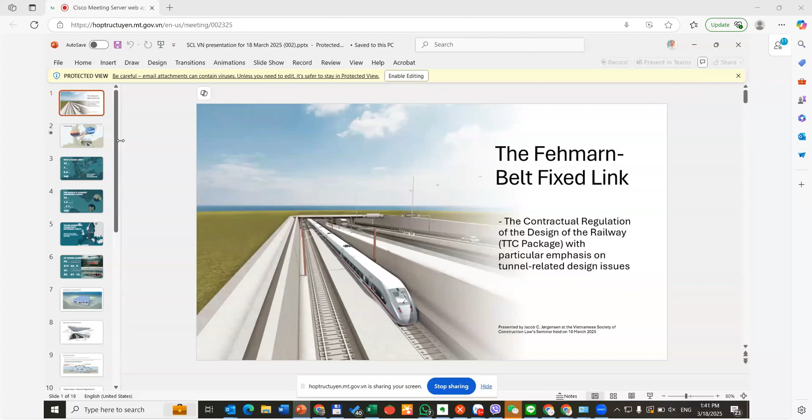So the fixed link you'll see at the bottom there is linking the island of Lolland, which is the southern island of Denmark, with the northernmost island of Germany called Fehmarn. It's part of at least one other fixed link, the Øresund link, which links Copenhagen to Malmö in Sweden. We also have a third asset in the company I work for called the Great Belt Bridge, which links Zealand to Fyn in Denmark.

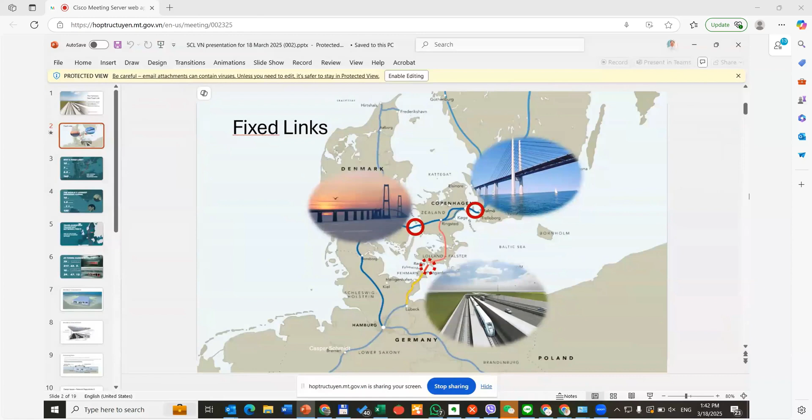So the Fehmarn Fixed Link is essentially aimed at facilitating the transportation of goods by rail from mainland Europe through Scandinavia up to Sweden, Norway, and Finland. You can see the numbers there.

As you'll see in a moment on the other slides, the link will have both a train or rail connection and road tubes. The road will take about 10 minutes by car to cross, going at 110 kilometers an hour. By train, going at 200 kilometers an hour, it's a 7-minute journey, and that will cut the transport time from Copenhagen to Hamburg down to 2.5 hours, saving approximately 160 kilometers.

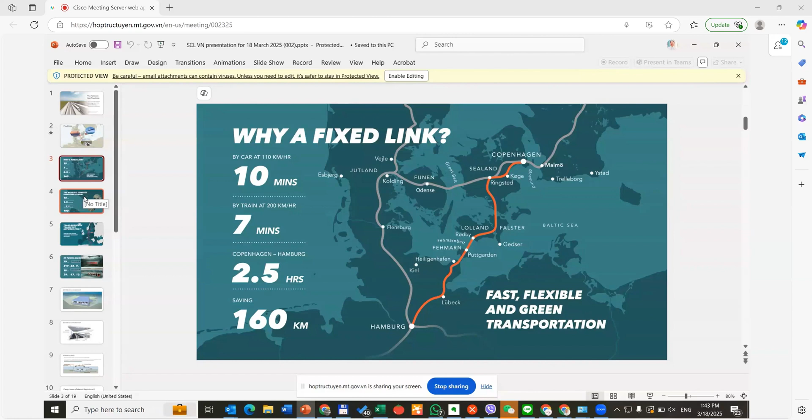So it's currently the longest immersed tunnel of its kind in the world. It has, as I said, 18 kilometers in length. The tunnel elements, which you'll see in just a moment, are manufactured at a factory in Denmark. That's the top circle you'll see there, the harbor and the basins where we push the tunnel elements into. The construction budget is 7.1 billion euros, and it will be 100% user financed.

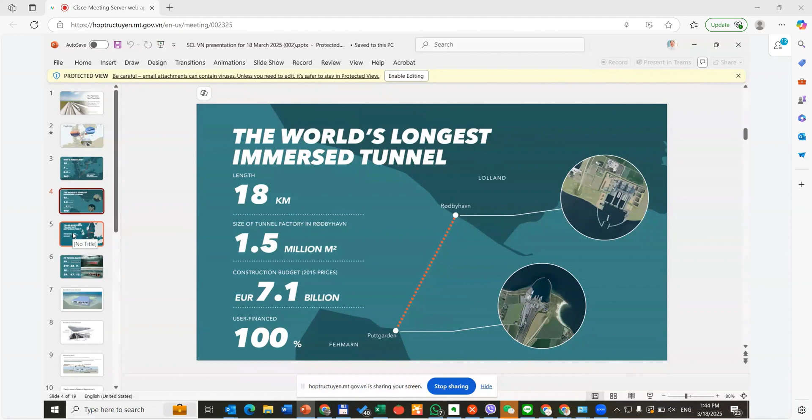It will become part of the so-called TEN-T, the Trans-European Transport Network, which, as you can see, will link Sicily down south to Norway and Sweden up north. So it is currently the missing link in that massive rail connection from the extreme south of Europe to the extreme north of Europe.

So the tunnel consists of 89 tunnel elements in total. There are 79 so-called standard elements.

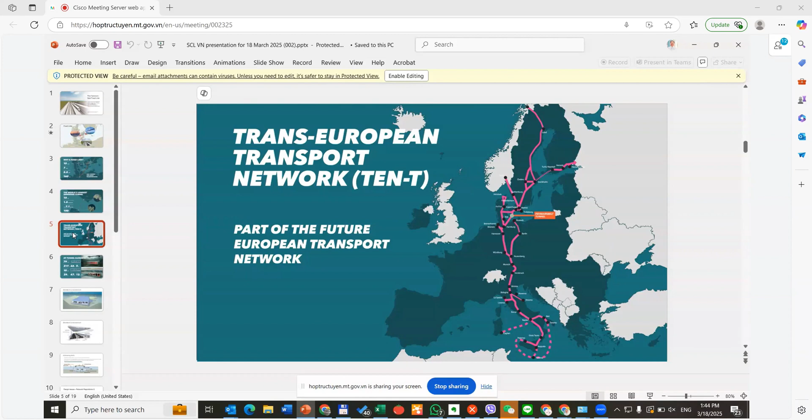So the standard tunnel elements are 217 meters in length. They are 42 meters wide and 9 meters tall. In addition, there are 10 so-called special elements with basement compartments, and you can see that they are shorter: 39 meters long, still 47 wide, and 13 high. The height is because of that basement compartment.

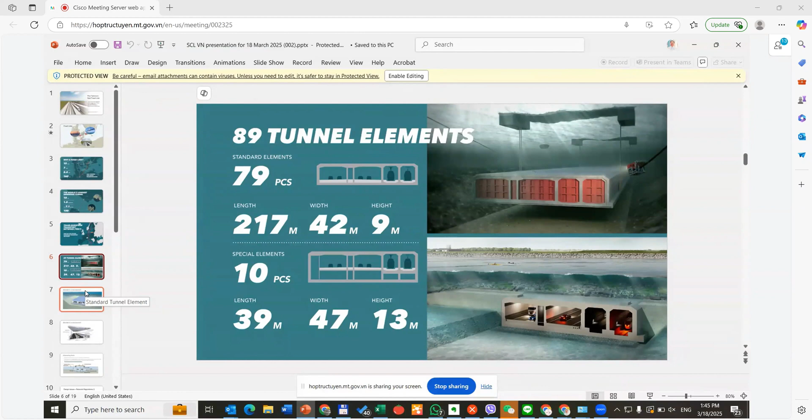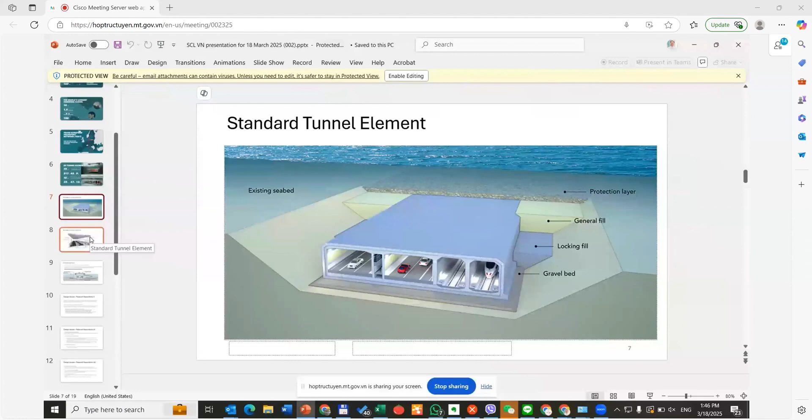There you have an illustration of a standard element. You can see that it is immersed into a trench that's been dredged into the seabed. You can also see the 2 road tubes to the left, and the train rail is in 2 tubes to the right. There's a gallery between the 2 road tubes for servicing the tunnel. When immersed into the trench, there will be a need to lock in the element. That's done with the locking fill, illustrated there to the right, which will prevent the tunnel elements from moving in the trench as a result of current and underwater waves. Then there's general fill on top of that, and finally a protection layer which will cover the tunnel elements totally under the seabed.

That's another illustration of the standard tunnel element, perhaps showing a little more clearly the road tubes, and to the right the train rail.

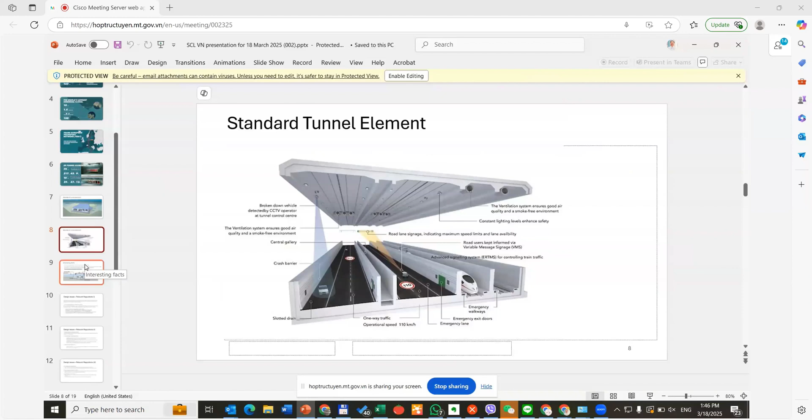So some interesting facts for you. The amount of rebar we're going to use for this tunnel corresponds to 50 Eiffel Towers. We have dredged, or rather our contractor FLC has dredged, 15 million cubic meters of seabed, which has been used to expand the Danish southern coastline with a total landmass of 2.3 million square meters, slightly bigger than the state of Monaco. If you try and click the link, Chung, there's an interesting video which I think we might have time for.

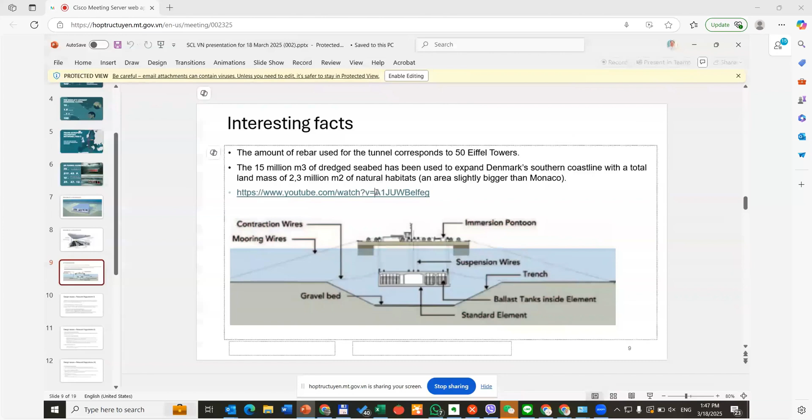Don't know if that works. If it doesn't work, maybe it does work. There we go. Oh, some Vietnamese commercials first. You can skip that. There we go.

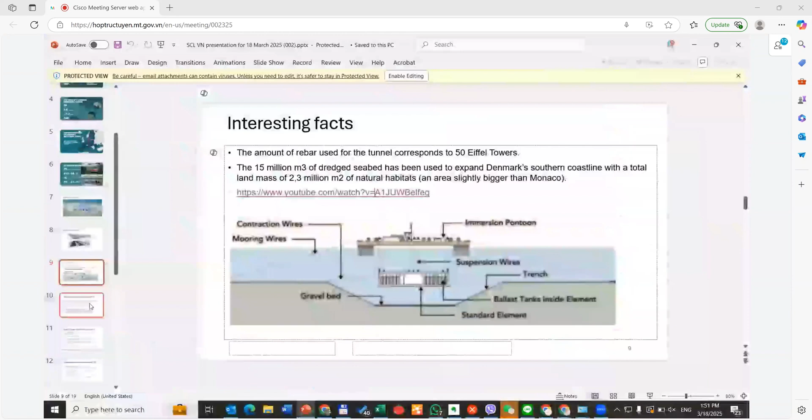So the train connection, which is probably of interest to some of you, this is not a high-speed train as defined under European standards. However, the train connection between Denmark and Germany that this tunnel will cater for has many similarities to a high-speed rail project. I will try over the next slides to give you an idea of how the design of the train, or the rail in the tunnel, is done.

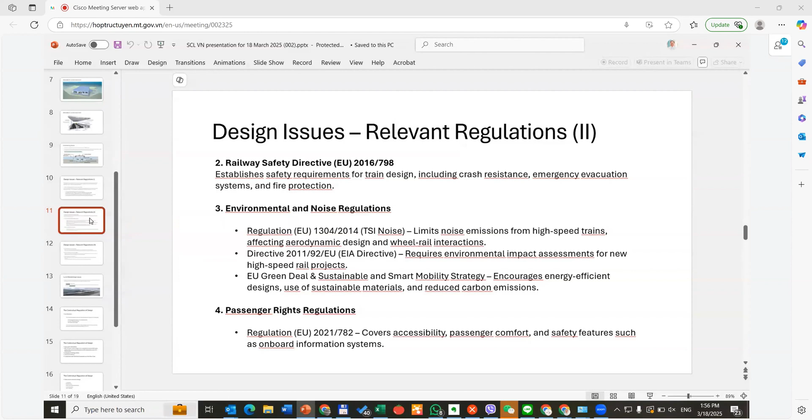These are interesting, I think: fire safety and crashworthiness. There are two standards typically in play. The first on crashworthiness sets crash energy absorption requirements, and the next is on fire safety. Then there's one on electromagnetic compatibility, in a directive from 2014, which ensures that high-speed trains do not interfere with other electrical systems such as signaling and communications. Then we have a standardization and certification regulation. In Europe, the European Union Agency for Railways, or the ERA, has to certify the trains, including high-speed trains, before they are put into operation. And according to contracts, compliance with EN and ISO standards is always required in practical life.

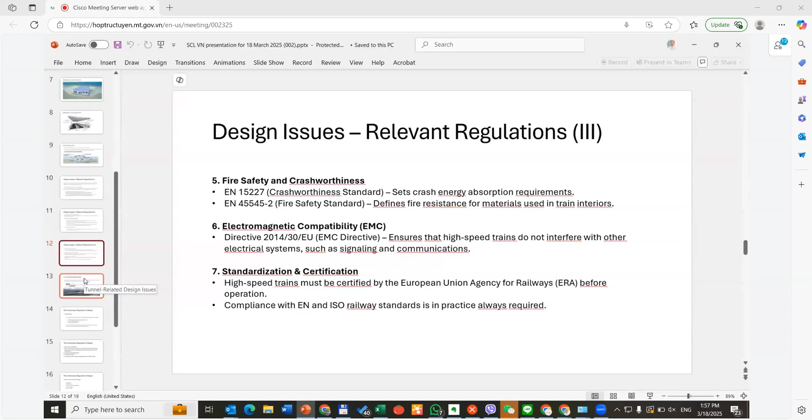So looking at the tunnel-related design issues specifically, there are two I picked out here. One is on the size of the tunnel, which has to correspond to the train speed. If you go into a tunnel with too high a speed, I've been told by the technical guys in my organization, the sonic boom will expose the train, the rolling stock, to loads they're not designed for. So there has to be a correlation between the size of the tunnel and the speed of the train.

The other issue is related: it's on pressure loading when going into the tunnel, because of the air pressure that the rolling stock is exposed to. You'll have to make sure that your procurement of the rolling stock is done and designed in a way that it can withstand this.

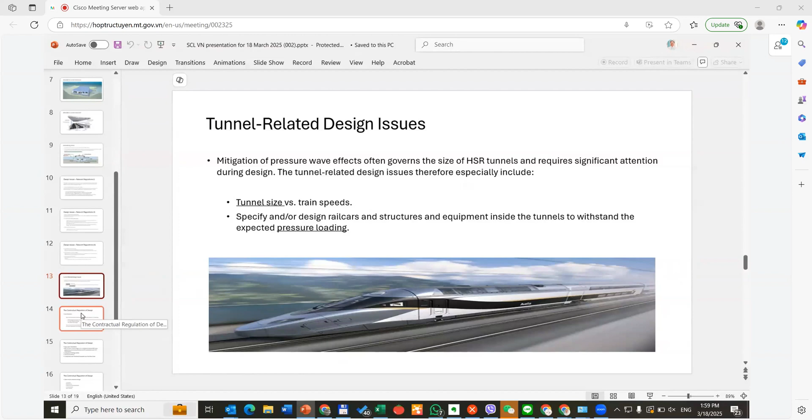Looking at the contractual regulation, what I got from the previous presenter is that the FIDIC form of contracts and the ones we have in our project are very, very similar, almost identical. So key elements here: in our project, the rail-related parts are split into the packages I mentioned.

First, the civil works, that's the casting and immersion of the tunnel elements, with 2 tubes for trains in each direction. Then we have the TTC, the train track and catenary package, that's the track and the power that will energize and allow the train to move. Finally, we have the TPS, the tunnel power supply, a transformer station that will supply power to the entire tunnel, including the train.

This is an EPC package, and the contractor is responsible for the design and compliance with technical standards for interoperability, etc. So basically, all what I just mentioned will be for the contractor to comply with when designing the train packages.

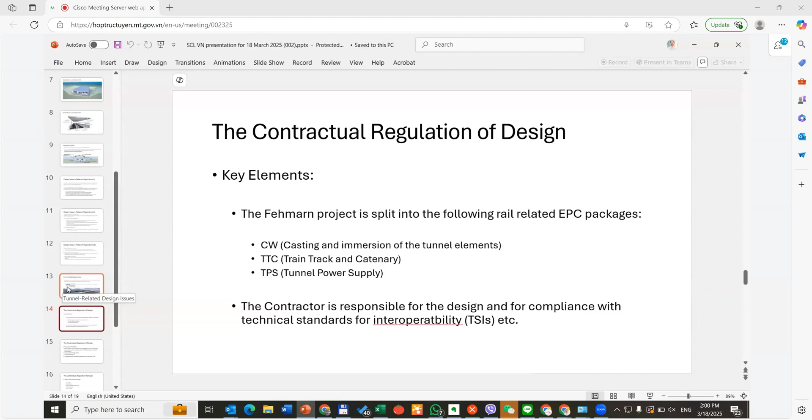Like you have in the logic form, the usual clauses there: rely upon information. The employer will provide information that the contractor can rely upon when designing the package.

We have modeling in our contract. All parts of the design must be modeled as per the BIM specification. This will facilitate managing interfaces to other parts of the project. So everything is done in BIM.

We have rigorous testing criteria. The adequacy of those is the employer's liability or responsibility.

We have the usual clause on ground conditions. The contractor must check the information given and design accordingly. And if the contractor sees something that is going to give rise to issues, he must notify the employer.

Same as you have in just about any other large EPC contract, whether it's based on logic or FIDIC, it's the same: compliance with technical standards as at the base date. If those standards change over the course of the project, this can give rise to variations or variation claims from the contractor.

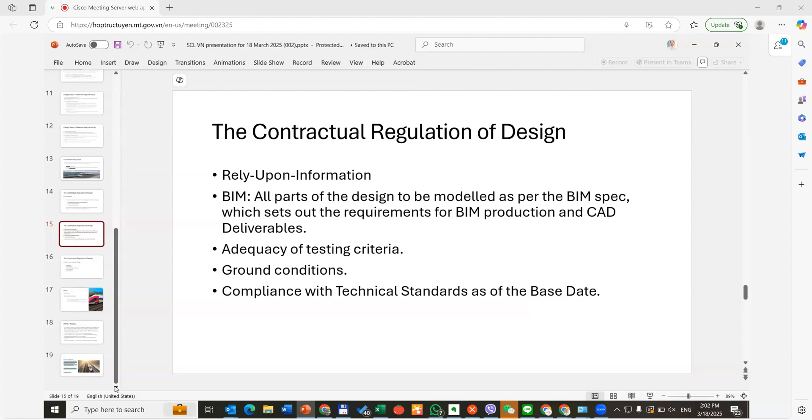Other issues here: availability. The amount of outages you can have per rolling stock is defined in the contract.

Maintenance guarantees go hand in hand with the availability. Safety and risk assessment is regulated. Interoperability is a key issue because the train in our project goes from Denmark to Germany. And finally, O&M training - all that is regulated in detail in our contracts.

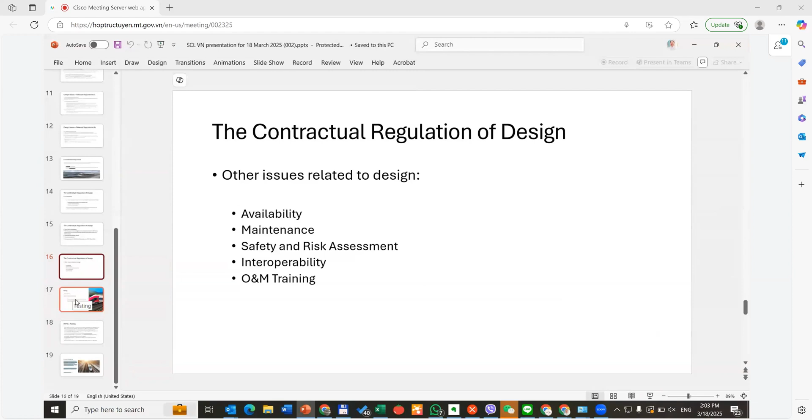So testing: there are provisions on factory acceptance tests. That's before the hardware is sent from the factory where the EPC contractor has purchased it. So basically at the supplier's factory, the goods have to be tested.

There's a site acceptance test. Once the goods are shipped to site, there will be a test regime in place. Then there are tests of the works on completion. Once the tracks are laid and the catenary is in place, a test will be done to establish whether the works are complete.

After completion, there are further tests during commissioning. Once the tests for completion are done, and once the system can be operated in a stable manner, there will be testing for operational integration before the works are put into commercial operation, and finally verifying that the achievements of the availability guarantees are met. So rigorous testing is in place.

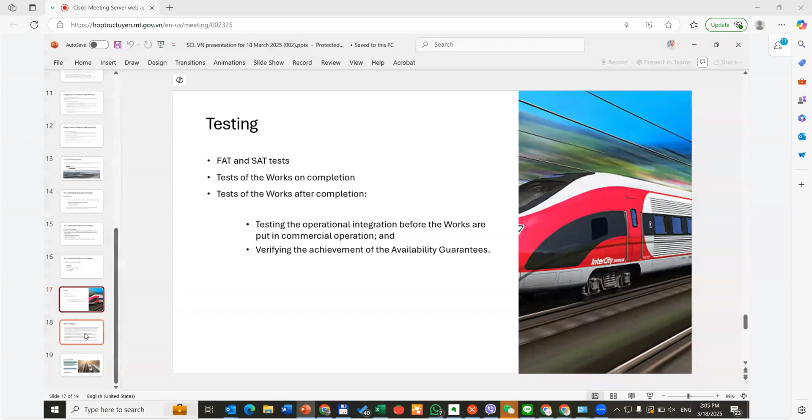So in Europe, we use these standards for testing after completion or after taking over. The ones I mentioned here are mainly aimed at establishing the functional safety.

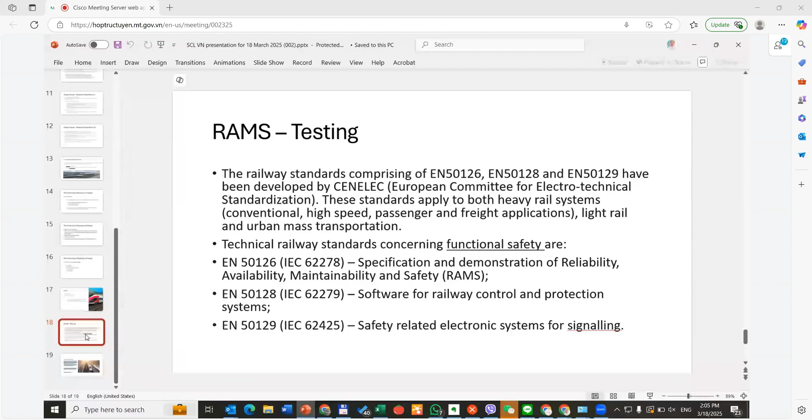At the bottom, that link will take you to the RAMS tests I just mentioned. I also have two others here. If you want a summary of the EU rules, that article I mentioned, the first link, is useful. And finally, I've added the AECOM report that came out 3-4 days ago, which is the playbook for high-speed rails, which might also be a source of inspiration.